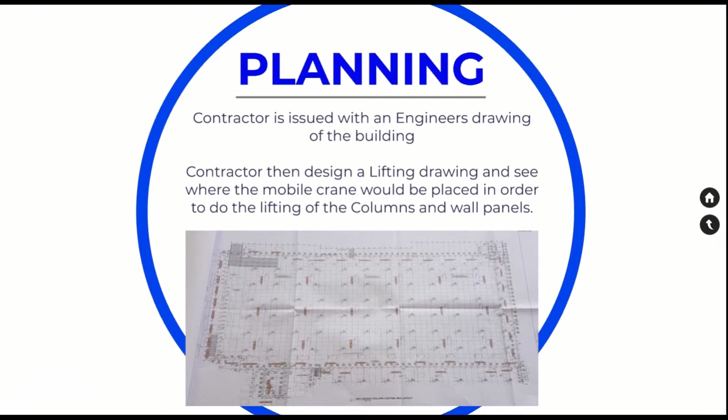Planning: the contractor is issued with an Engineers drawing of the building. The contractor then designs a lifting drawing and determines where the mobile crane would be placed in order to lift the columns and wall panels.

Casting of columns: all panels to be casted are indicated on the engineer's drawing with specific detail. Excavation is done for the front columns, and concrete is poured to create a specific level to work from. Concrete beds are set out to pour columns and walls, and the surface beds are casted to start construction. The surface beds are casted to the contractor's drawing and numbered in accordance.

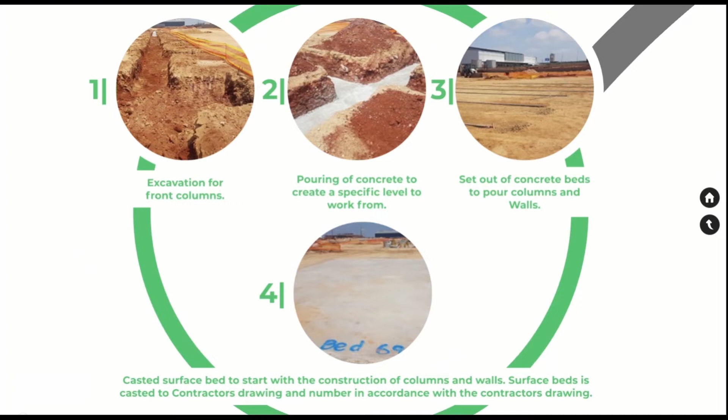Rebar steel: the steel rebar is placed on the casting surface bed. Formwork is done and lifting lugs installed depending on the size of the column. The lifting lugs are secured to the rebar inside the column box.

Lifting lugs are numbered to ensure quality control, and lifting lugs are bought in batches and sent for load testing — each lifting lug is rated for a 5.8 ton load test per lug. The red cup is removed after curing of concrete, and the lifting lugs are secured. A base plate is placed on top of the column with holding bolts for the roof structure secured in place.

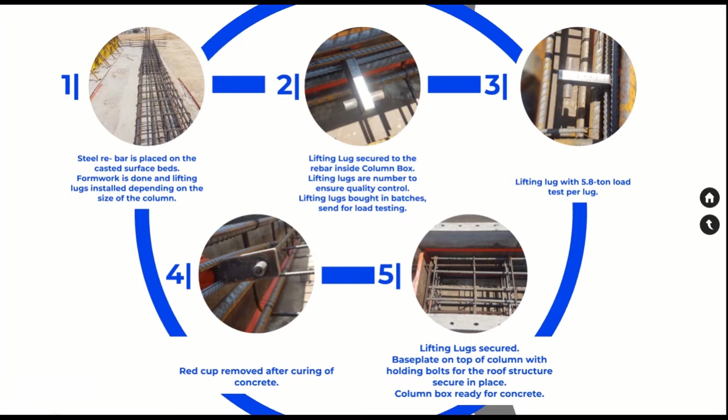The column box is ready for concrete. Pouring of concrete: the column box is ready, and the concrete is casted within it. The plastic cup casted in the columns is removed in order to expose the lifting lug, which was casted into the column.

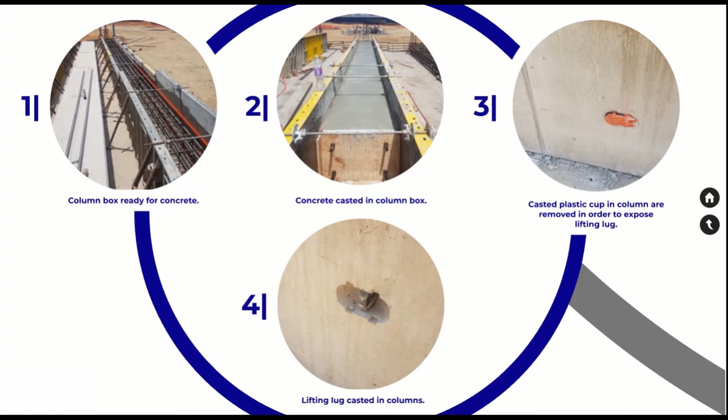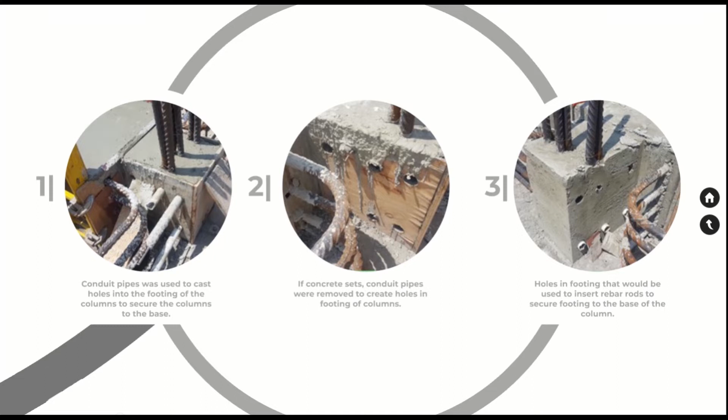Conduit pipes were used to cast holes in the footing of the columns to secure them to the base. Once the concrete sets, the conduit pipes were removed to create holes in the footing. These holes are used to insert rebar rods to secure the footing in the base of the column. Ready to be lifted.

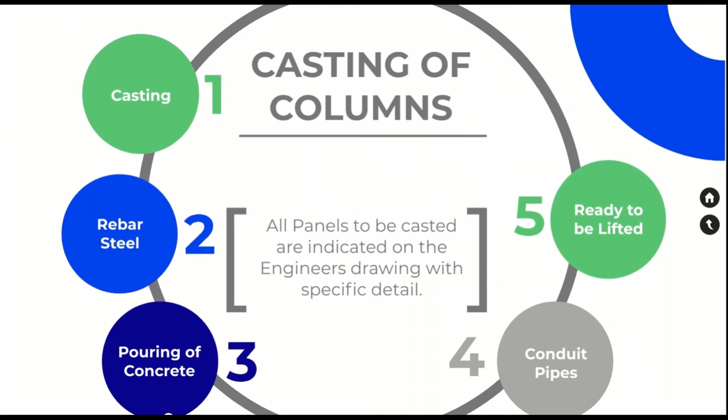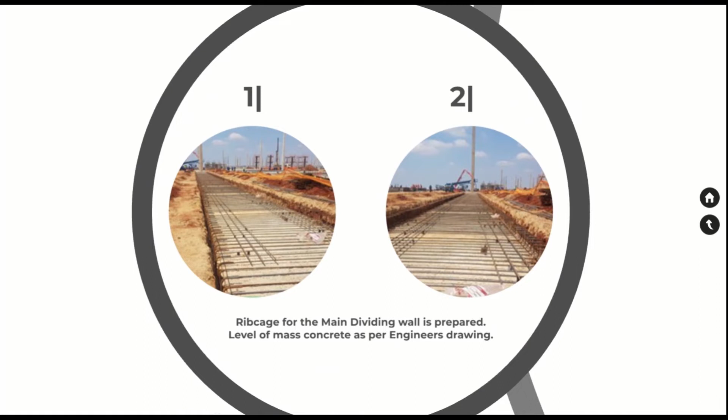Base of the columns: the rebar cage for the main dividing wall is prepared, with levels of mass concrete as per the engineer's drawing. The concrete sub-bases were poured next to the area where the columns would be erected.

The base is used to secure the columns in the upright position. The exact position of the column is marked on the concrete in the rebar cage. 16mm holes are drilled into the center of the markings, and 16mm holes are also drilled in the center of the columns. A piece of round bar is inserted in this hole when lifting the columns, ensuring that the columns are placed at their exact position.

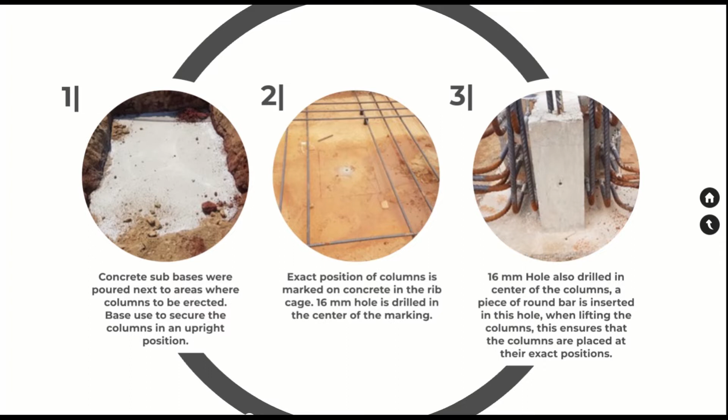The columns are ready to be erected, and secured to the sub-base structures in a 100% upright position with column stiffeners. Columns are lifted with a special pulley system secured to a spreader beam and mobile crane. They are secured by a red stiffener pole attached to the column and surface bed, keeping them in a 100% upright position after the poles are secured to the concrete floor and columns. Left and right-handed threads are on the pole ends.

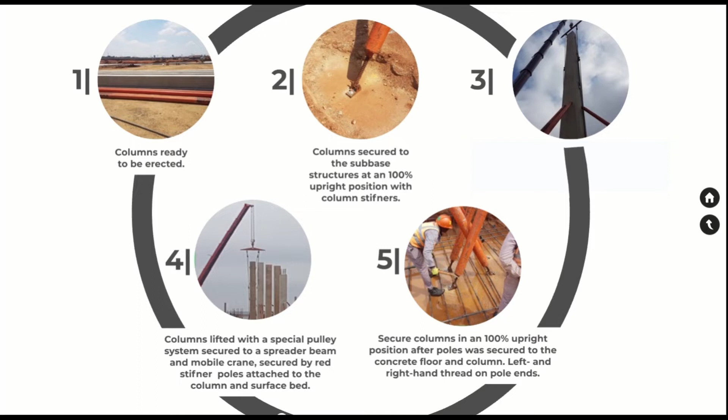Reinforced steel is placed through the opening of the footing, secured with steel rebar, and mass concrete is poured into the footing of the rebar cage. Temporary formwork is done around the lower securing points. After the concrete is cured, the securing poles are removed and the openings are closed with the casting of concrete.

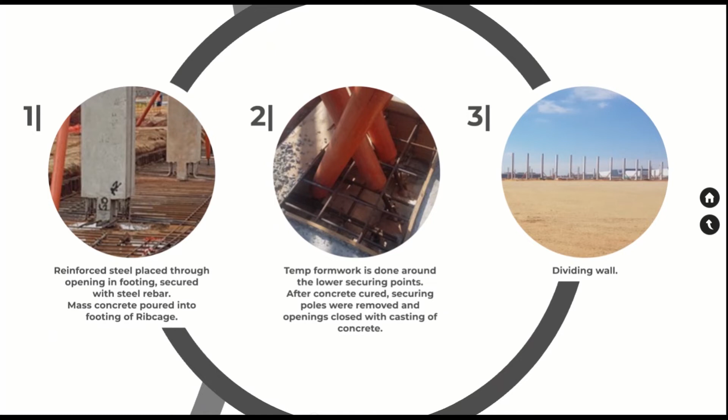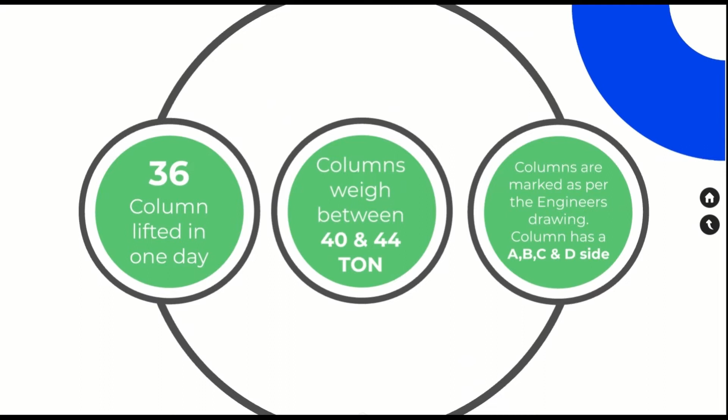Dividing wall: 36 columns are lifted in one day. The columns weigh between 40 and 44 tons and are marked as per the engineer's drawing. Each column has an A, B, C, and D side.

The engineer's drawings show the tilt-up panels, indicating the grid line positions where panels are to be placed. Drawings are available for every panel to be fitted at the exact location as per the engineer's drawing. For example, panel FW07H would be fitted on grid line A, crossing with grid lines W and X. The tilt-up panels indicate positions for placement and how to grout footing, with canopy details and dock leveler details indicated on the engineer's drawing.

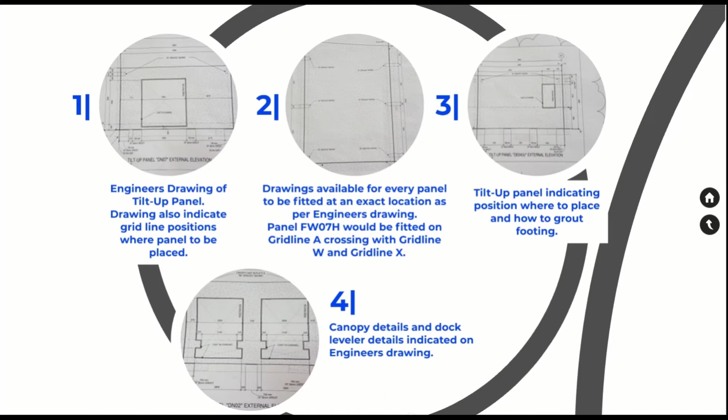Preparation to cast concrete beds in order to cast tilt-up columns and panels as per the contractor's set-out drawings. The surface bed is casted, polished smooth, and leveled. Release bond is applied to the concrete slab, and then again to the top of the panel after concrete is poured.

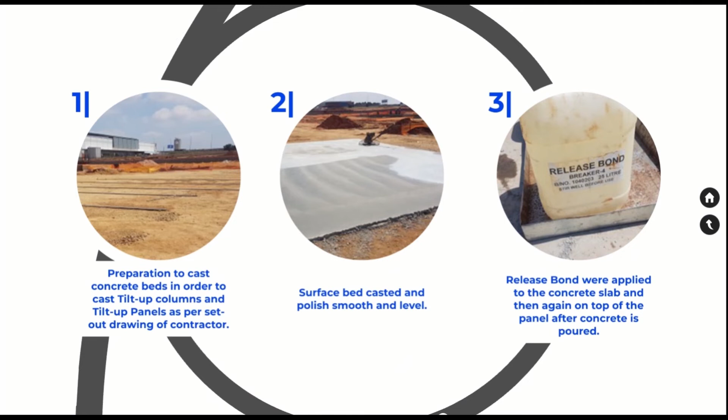Lifting lugs are casted within the columns and panels. The length of the lifting lug depends on the size of the panel or column being casted. Each lug is certified to lift up to 5.8 tons. Steel rebar and lifting lugs are placed as per the contractor's drawing and engineer's detail.

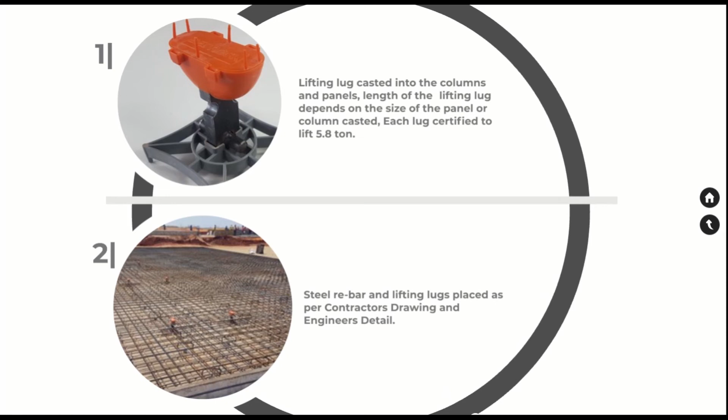Concrete is casted, and the next tilt-up panel is built on top of the existing one. Rebar is fitted to the tilt-up panel, and panels are casted on top of each other as indicated on the contractor's drawing. Tilt-up panels weigh up to 50 tons and are casted as per the engineer's drawing.

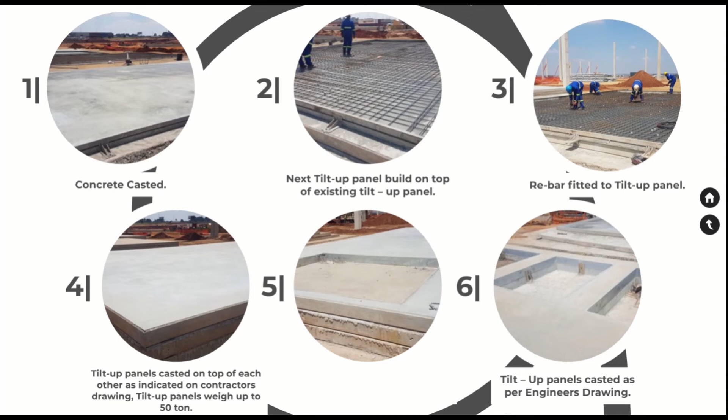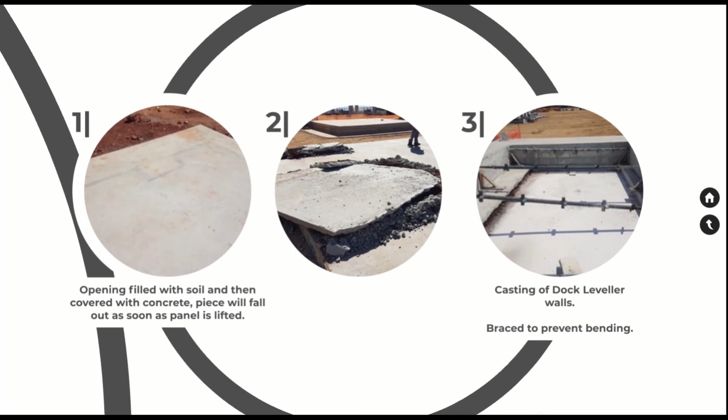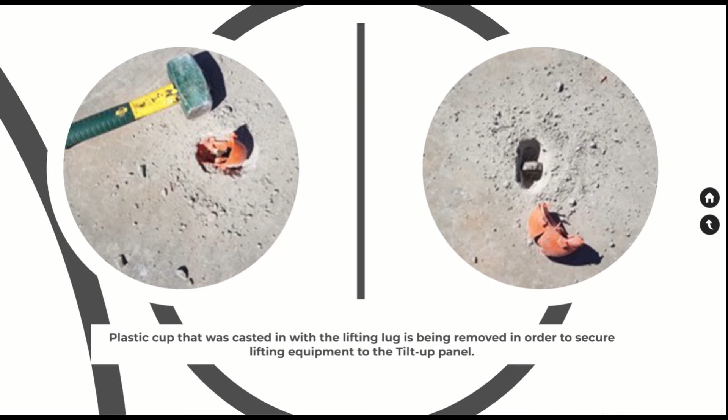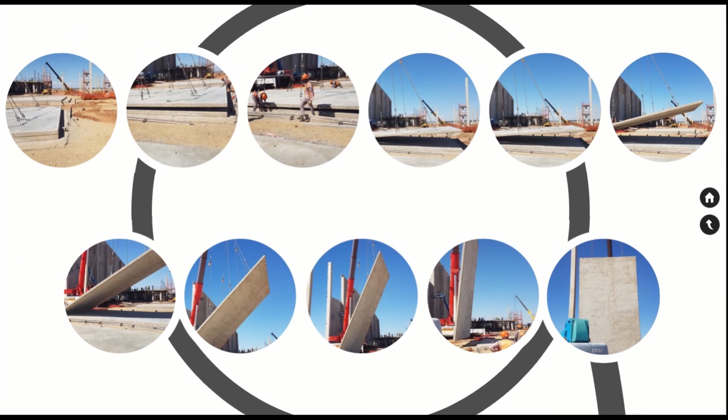The plastic cup casted within the lifting lug is removed in order to secure the lifting equipment to the tilt-up panel. The area should be clear before the lifting process starts. Once the tilt-up panel is released from the bottom panel, contractors start to remove pieces of concrete on the sides of the panel, on all sides. Once the pieces of concrete have been removed, the contractors clear the area and the lifting begins.

A spreader beam is attached to a pulley system connected to the panel itself. The panel weighs up to 50 tons, and there are 16 securing points which can each handle up to 5.8 tons, giving 92.8 tons of lifting capacity. This picture shows how the pulley system pulls on all 16 lifting lugs and keeps the panel upright during installation. Note the pre-fixed brackets mounted on the columns.

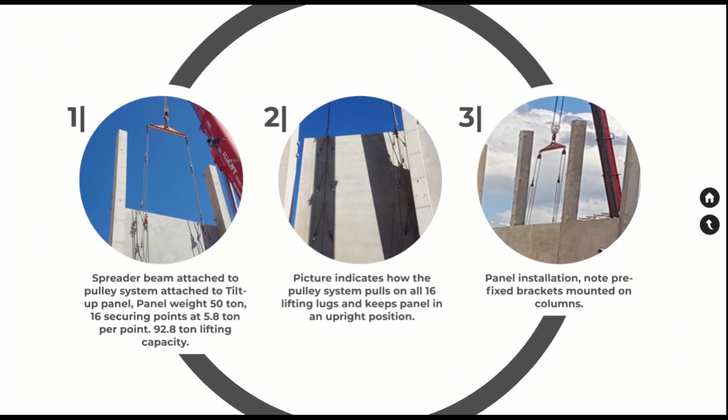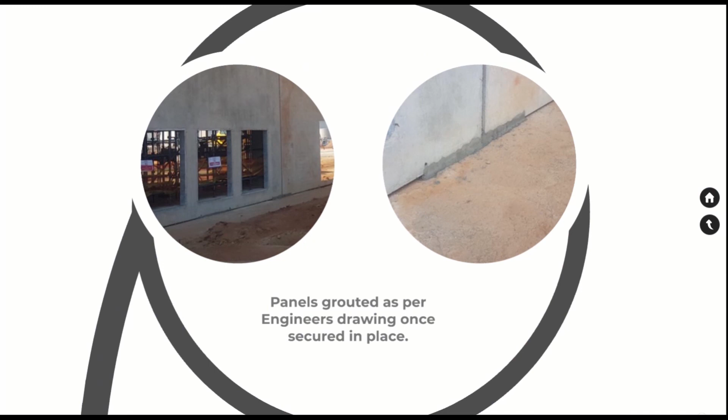The panels are grouted as per the engineer's specifications once secured in place. The completed wall.